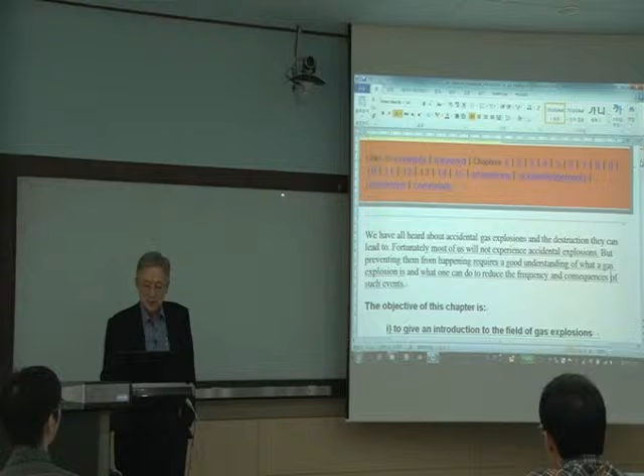Gas explosion. This chapter is again gas explosion. So we start to cover already and talk about the definition of the gas explosion.

Yesterday, Chu Bong-shik pointed out one mistake I made in the shock wave profile. So if I make a mistake, anybody can make a mistake. I want you to really point it out, then we can make corrections, okay? Can you see this clearly? Dr. Kim, can you see?

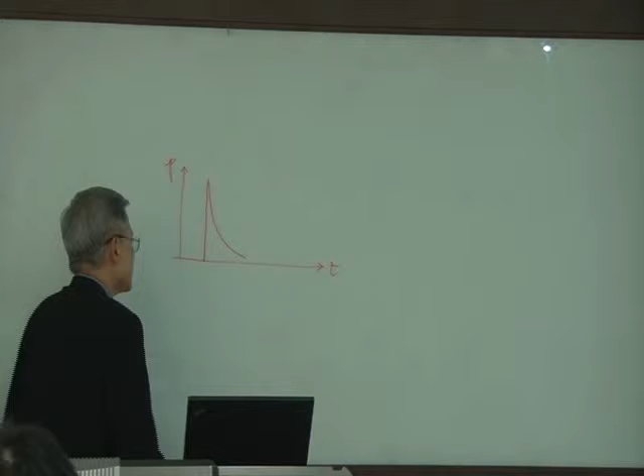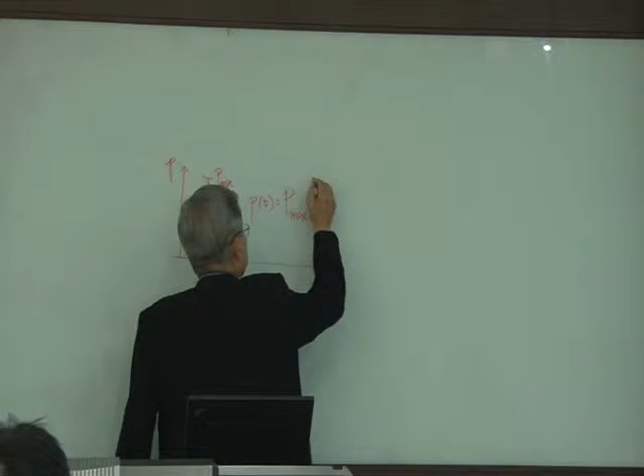So what we talked about yesterday briefly, I'm going to come back to this, of course, in early November when we deal with the real shock wave. But for the time being, this is what I showed, straight up and down. And this is what I mentioned. Then I gave you an equation set saying this is P max, and this is equal to P max times e to the minus T over theta, or I said the whole thing could be minus something like alpha T. Right, that's what I said.

Bong-shik pointed this out after class. He could have stopped and told me right at the moment, then I could correct it right away. What's the mistake here? In the class, we can talk about anything. I always mention there's no such thing as 'you're right, I'm wrong.' In the class, we discuss things, understand them, and move on. So here, I made a mistake.

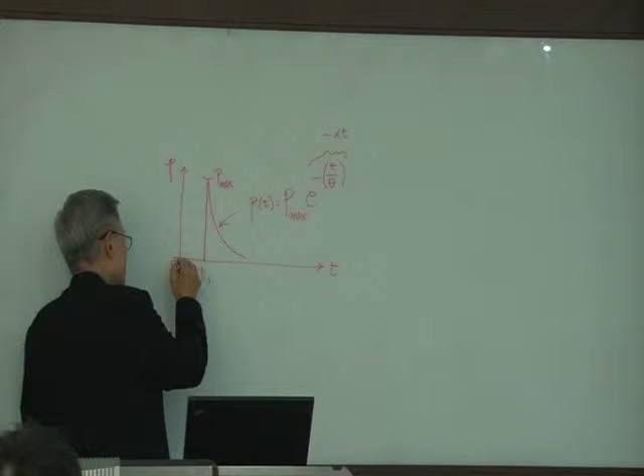Sung-tae, what's the mistake I made here? I will say this is time T1. Of course, this is 0. Typical shock wave pressure profile, yes.

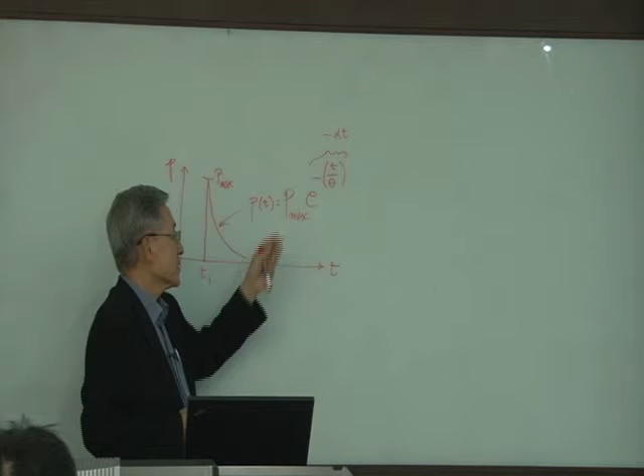The mistake is in fitting this particular equation. I have to set this axis as P, and this point I have to set as 0, right? Makes sense? For example...

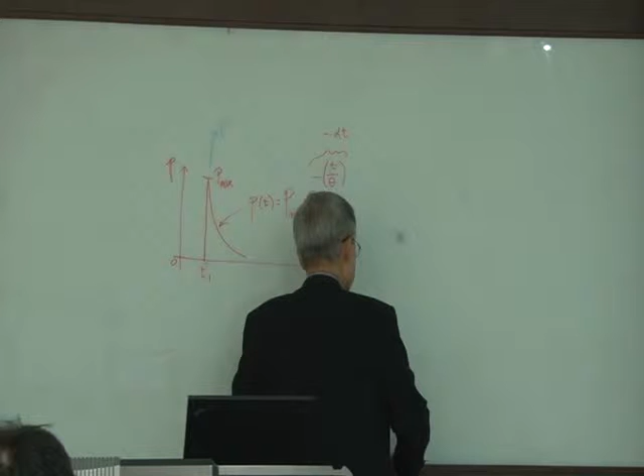Core of explosion. Explosion occurs right here. I'm standing right there. Then the shock wave, of course, will propagate, then hit right there. Then it passes - the shock wave will pass by. So this is the shock wave pressure I feel right on that side here.

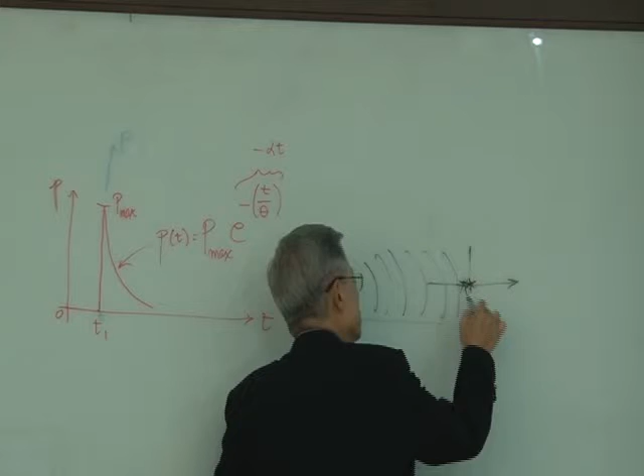But if I set this point as the starting point, the reference point, this is right there. Then I have to move this axis to here rather than here, right? So it takes time, of course, for the shock wave to reach from here to here.

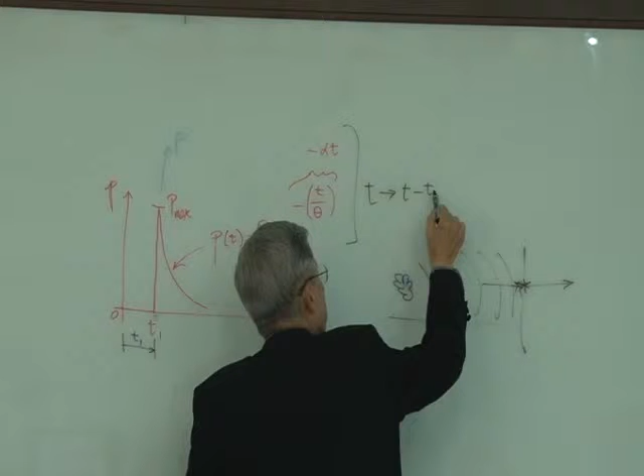Let's say time T1. If I'm going to set the reference point right here, then what do you have to modify in this equation set? You replace T by T minus T1, right? Say yes. So if you replace it, then you can start to count from the origin. This is origin, this is 0, the absolute 0 point. Makes sense, right?

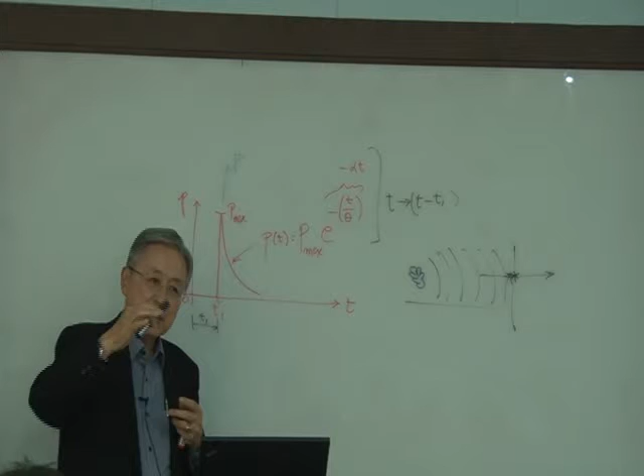So to use this equation set to calculate the responses and all that, if you use T minus T1, that's okay, but your reference point is right here. And the same thing happened for the air explosion problem set.

Could it be down there? But this is P max. So I said this point is over pressure, this is under pressure. So the equation set here could be P(T) equals P max e to the minus...

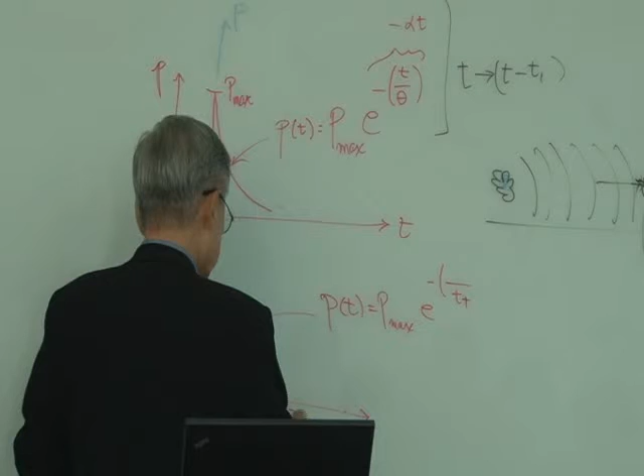T1, I use T plus, right? I use T plus. This point, this is T1. So this is T1. This is going to be T plus. I use this...

Or again, I can use alpha T, then 1 minus T over T plus. You have to replace the same thing, right, if you're going to shift this to here. If you shift that to there, then down here, this is set as 0, then this is the equation set.

But if you're going to use this point as the reference point, then you have to move T to T minus T1. This is where, in other words, sometimes there is a convenience for the computation.

So, for example, I have a ship. Explosion occurs right there. Then when it explodes, the shock wave will propagate and hit the surface of the hull.

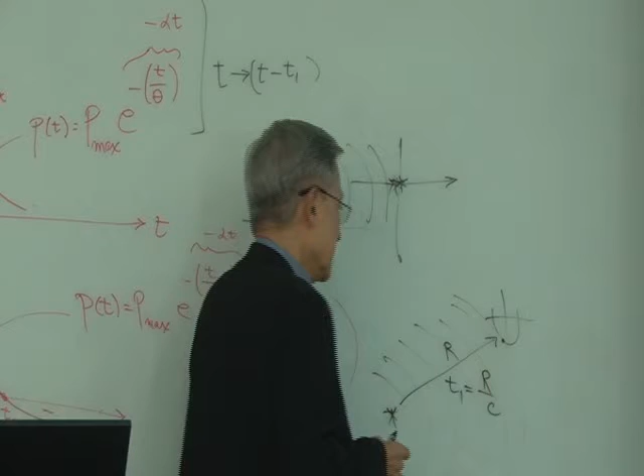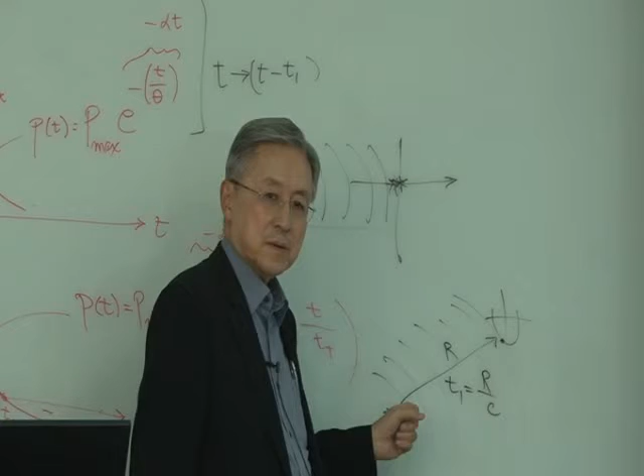So some people start counting the time right from here. Then this equation set is all okay, but oceanographers who work in that area - my interest is not only here but also here. Then the reference point is here. When it explodes, you start to count, right? When you start to count, then it's the reference time 0.

Then you have to replace T by T minus T1. But another aspect - over here, I'm going to call this guy a specific name. This is dynamic pressure.

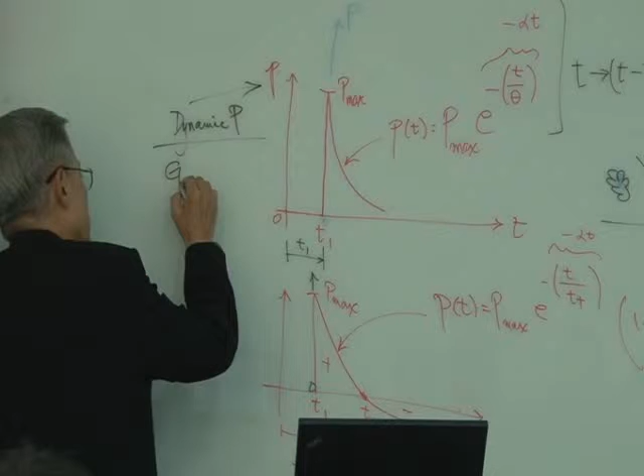Some people call it the gauge pressure, same thing here, dynamic pressure. But when you're...

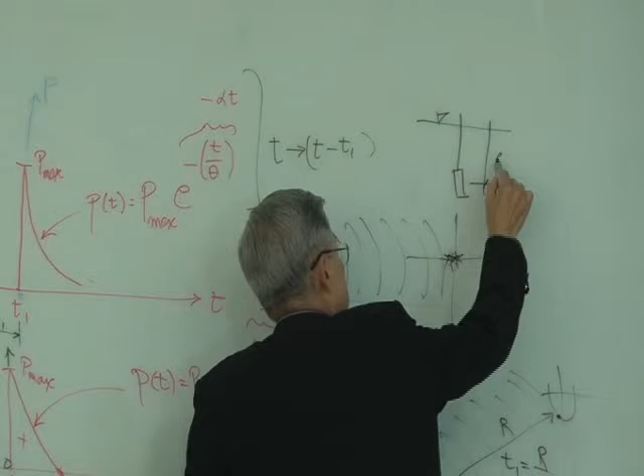dealing with pressure gauge out there, for example, this is the ocean. So when you put the hydrophone down at a certain depth D, there is an initial pressure, right? Initial static pressure, it's hydrostatic pressure. Initial hydrostatic pressure: rho GH, rho GD.

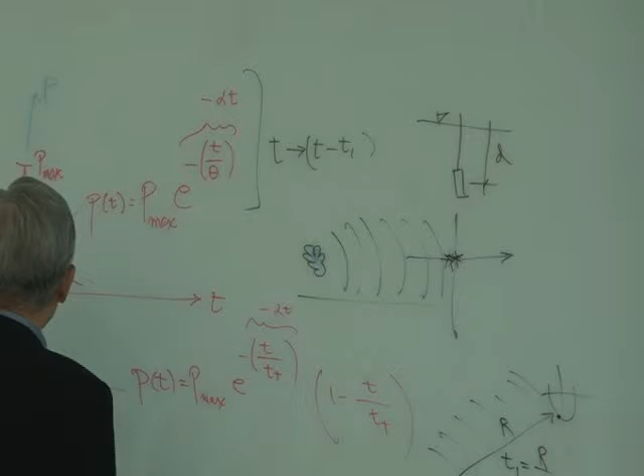So if I draw the shock pressure in an absolute sense, I'm going to draw this as P. This is absolute, nothing to confuse here, absolute pressure. Okay, I'm going to draw the absolute pressure.

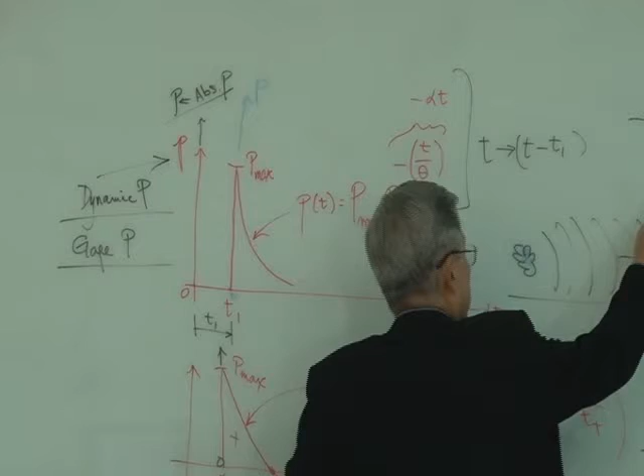So right at this point, your charge or source could be right there. I have to draw the initial pressure. Initial pressure is there when you deal with the total pressure.

Confusing? Nothing to confuse, total pressure. My interest is the total pressure, which is absolute pressure at the time, when initially everything is calm, no gas explosions, no chemical explosions. Then what pressure do you have? You have hydrostatic pressure, right? That's it, right?

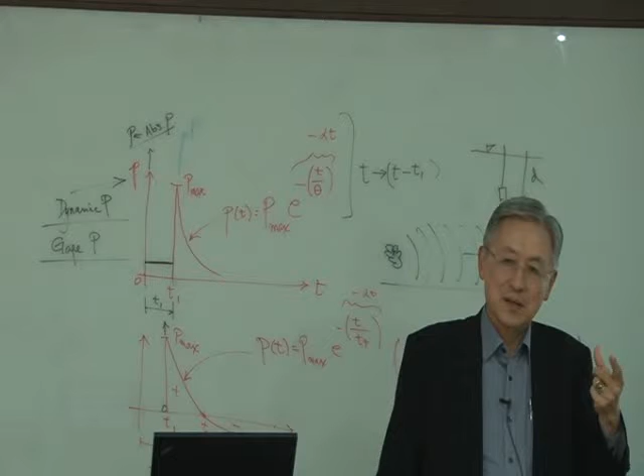Sure, that's all? Or more? Where did the atmospheric pressure go? Do we have pressure right now? Are we under pressure? What pressure? Gravitational pressure, right? We are under atmospheric pressure. We are not in a vacuum. So we are at 1 bar, right?

1 bar, how many megapascal? Anybody know? 1 bar is 101.3 kilopascal. Yeah, see, 101 kilopascal is 1 bar. That's what Hyun-Chul said.

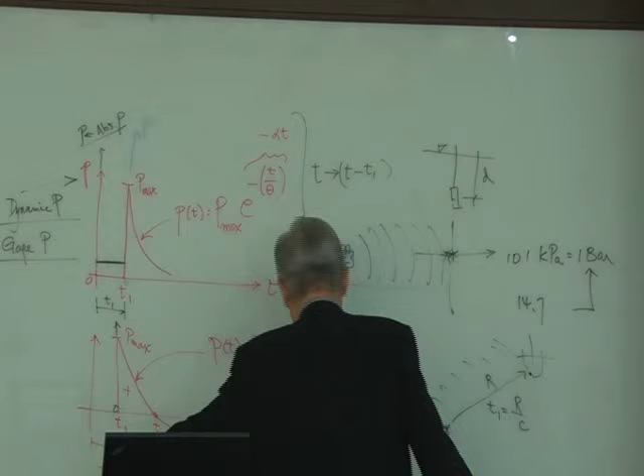We are under 101 kilopascal. Gosh, that's amazing, isn't it? In gravitational units, 1 bar is 14.7... 14.3 psi, pound per square inch. Typically 1 bar is 101 kilopascal.

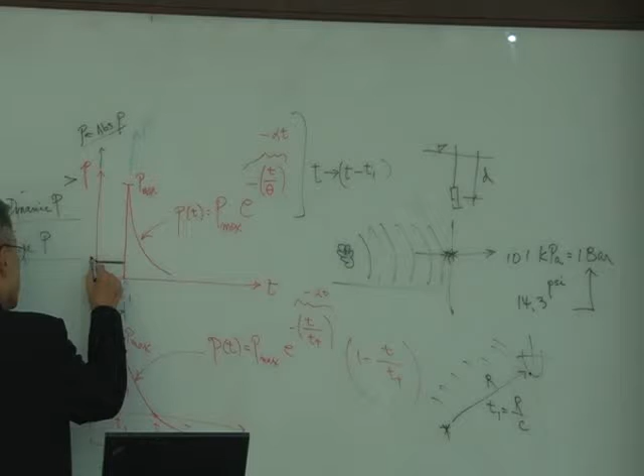Plus hydrostatic pressure. So initially you have PA plus rho GD. This D is the hydrophone depth, for example, just an example.

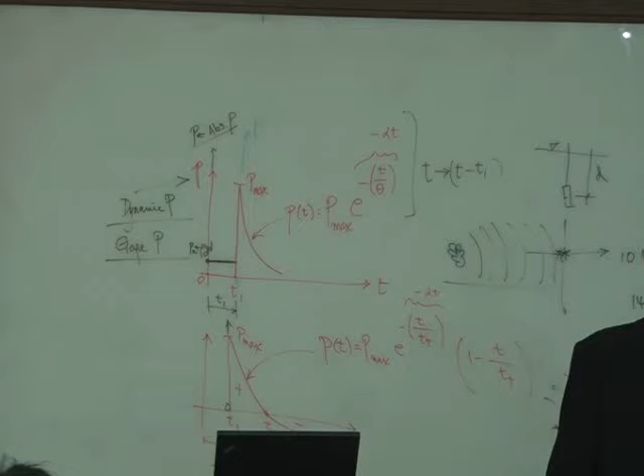In other words, simply static pressure is there when you deal with absolute pressure. But usually for dynamic analysis, you don't have to worry about the static pressure. Why? When you compute the response for moving loading, dynamic loading, of course we don't care that static pressure is there. You can just compute the response, which is a static response, and simply add it on. Right, Songtae? So nothing changed.

Then you can add over here. It could go up, then what happens? Is it going down the same downhill like this? No, because there is always static pressure there. Then this could approach the static pressure, which happens to be the atmospheric plus, in this case the hydrophone, the hydrostatic pressure.

But if some other things happen, of course, a lot of things could happen, things like that. We'll discuss all the aspects starting November.

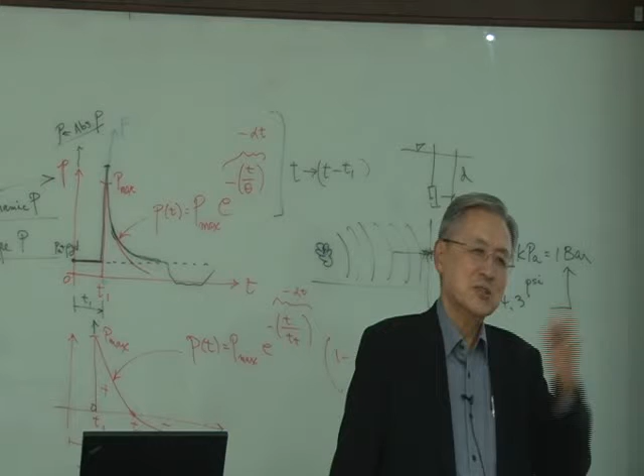Because I'm really doing my best to say some meaningful things on gas explosion. And of course you're not going to just sit there listening. You're going to work on gas explosion, doing some good initial research on gas explosion yourselves, in addition to the fire.

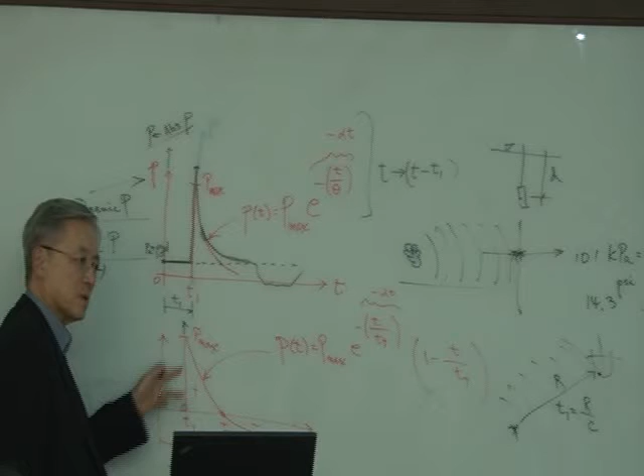Then we'll be working on November, we're gonna work on the underwater explosion stuff. Okay, so the same thing happened, you could have initial pressure go up and down. Okay, so this is what Bongshik, he came late.

Bongshik, so this is what he mentioned to me. It's very clear. Gas explosion.

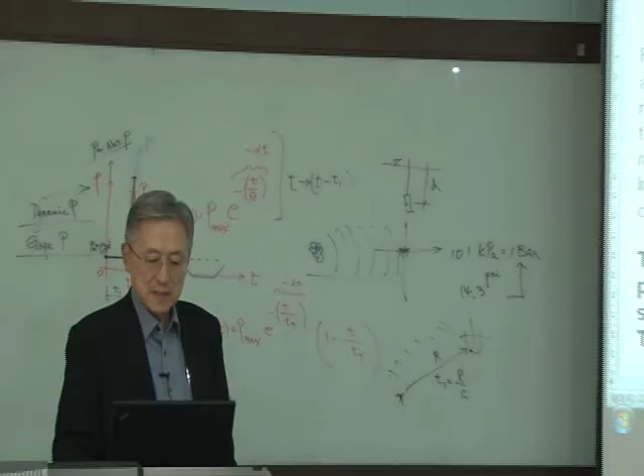How many of you read chapter 1? How many feel like who cares? You should care. Whoever is just sitting in for fun, that's okay, but listening is also good.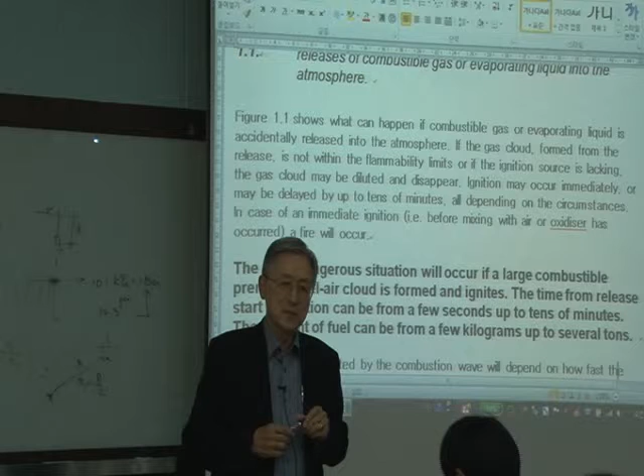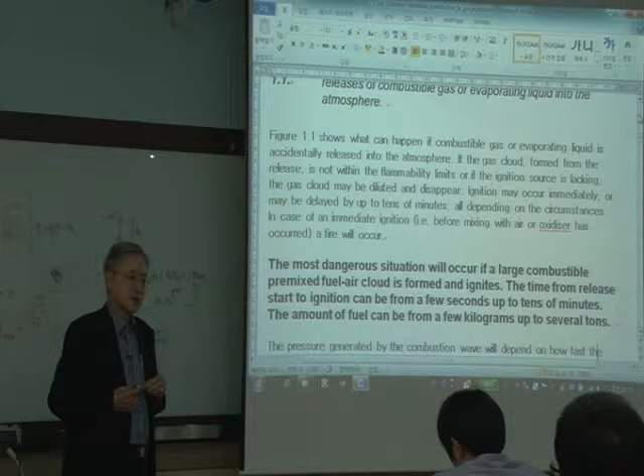But whoever is working in Professor Chang's lab, you should, I said should, not you may, you should read the Gas Explosion Handbook. It will provide you an excellent foundation to work on gas explosion, in conjunction with other chemical process design or structure system design, or vice versa.

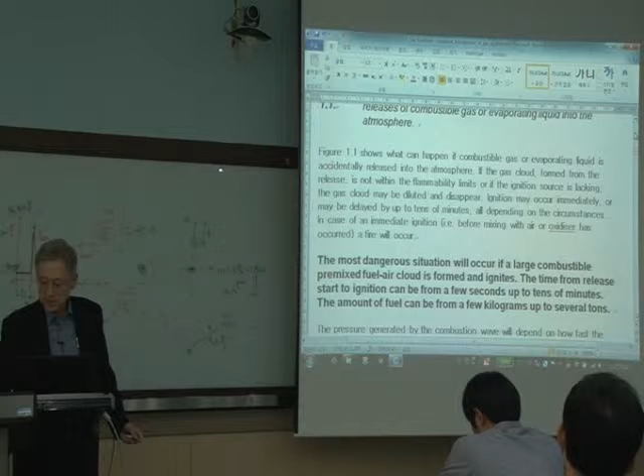And this highlights, I did it just to point out some importance, I talked about that before. And also BLEVE, you call this BLEVI, is it correct? I call it BLEVE. When you think about BLEVE, you have to talk about the pressure vessel, and you are talking about high temperature.

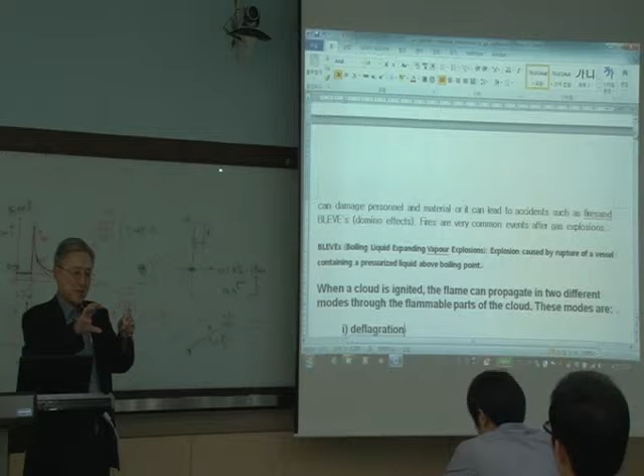So then this could generate something like a domino effect. Then you can think of the high pressure vessel connected like a train, a continuation connecting the pressure vessel type. And deflagration and detonation, we talked a little bit about on Monday. Deflagration mode of flame propagation is subsonic.

Read well between the lines. The deflagration propagates at subsonic speed relative to the unburned gas. The unburned gas is there, and it's moving faster too.

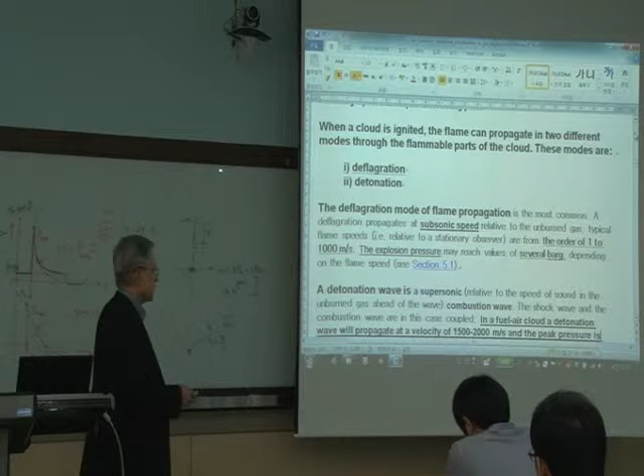I think on a later portion of this chapter there should be a nice 1D picture. We're going to wait until that time. But this...

Speed is 1 to 1,000 meters per second, depending on the unburned material property. Could it be oil? For oil, acoustic speed may be different, of course, from acoustic speed in water, air, and all that.

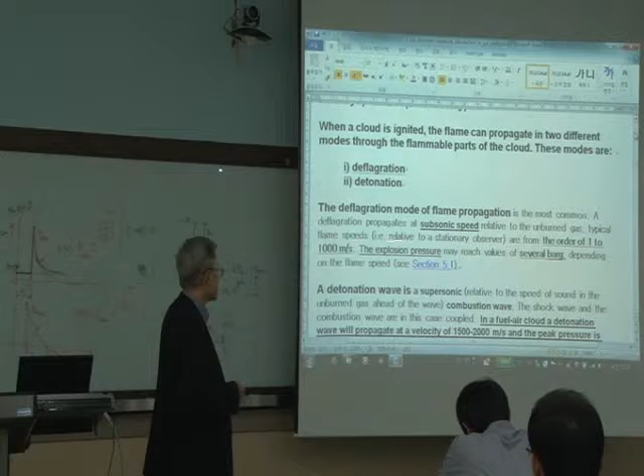Look at the range of speed here. Deflagration flame speed is 1 to 1,000 meters per second. Think about the range—it's a tremendous range.

For the medium I'm always dealing with, it's water—water or air. Acoustic speed is rather fixed, about 350 meters per second, or 1,500 meters per second, fixed.

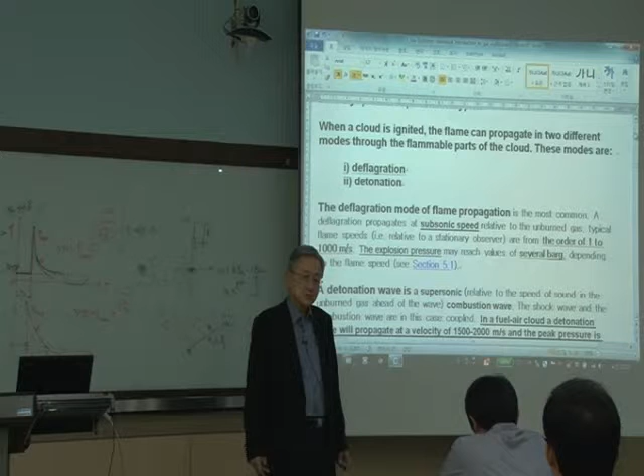But in gas explosion, it's a tremendous range. Deflagration flame speed, you can deal with 1 meter per second to 1,000 meters per second. Deflagration simply means rapid burning—that's about all, rapid burning.

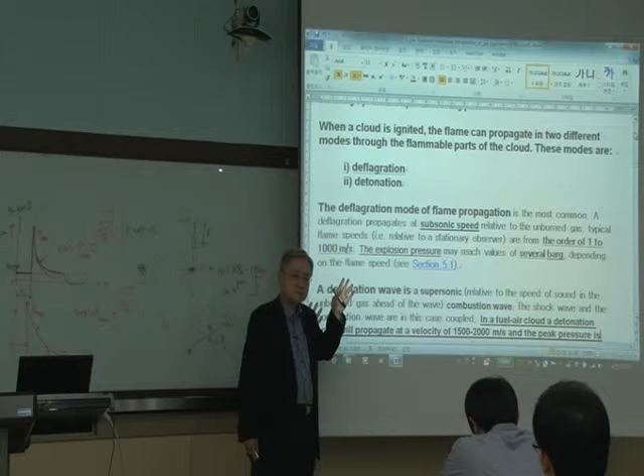When you talk about detonation speed, it is supersonic, meaning it's higher than the acoustic speed of the unburned gas or unburned material, whatever the material is—supersonic, higher than acoustic speed in that medium.

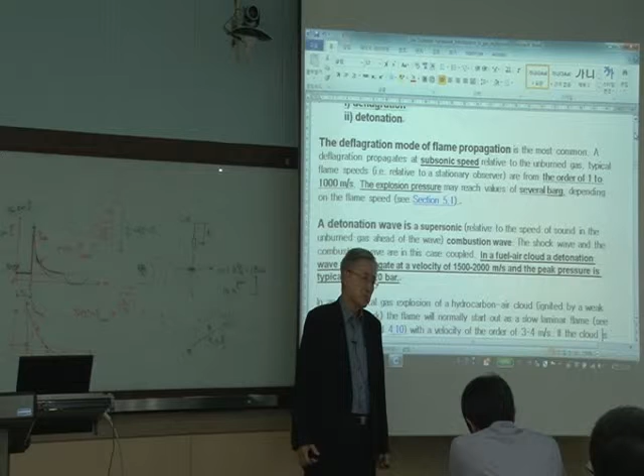In the fuel-air cloud, detonation wave will propagate at the rate of 1,500 to 2,000 meters per second, which is pretty generous. Detonation speed in water for a chemical explosion is 8,000 meters per second. So for gas explosion, the range is about 1,500 to 2,000 meters per second, which is pretty low, I'd say.

And peak pressure in the detonation situation is rather low—it's 15 to 20 bar.

For the chemical explosion, I'm talking about pressure of about 50,000 times atmospheric pressure. Tremendous—it's absolutely, really, really high—50,000 bars.

So the comparison isn't really there, but gas explosion happens every day. Did you see the news last night, or even this morning? Did you see the news? There was...

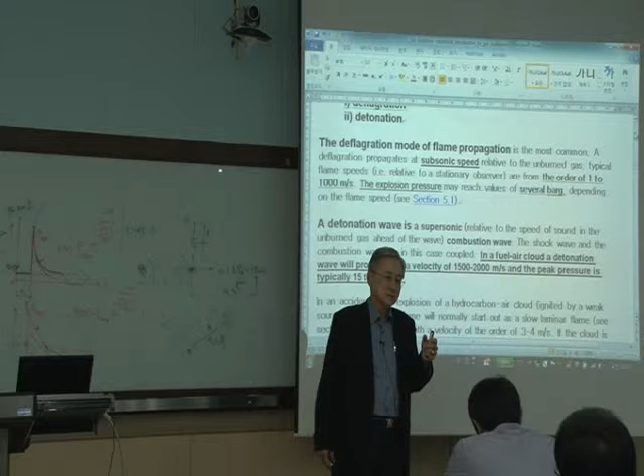This happens every day. In Busan last night, the CCTV camera happened to capture the accident. It was a human accident—he happened to touch the valve, then it looked like it loosened up or broke. Then the gas just vaporized and came out, then spread all over.

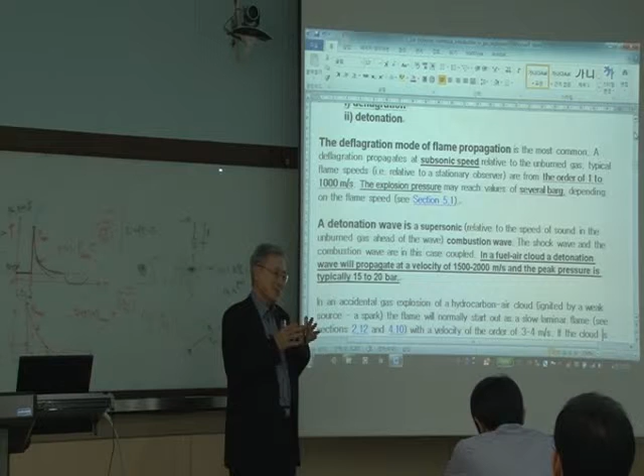So usually explosion, especially gas explosion, is always connected to an accident. That's connected to safety, connected to safety management. One small mistake looks like it kills everything.

So with this subsonic deflagration, the pressure is very, very small—it's just several barg. G is gauge.

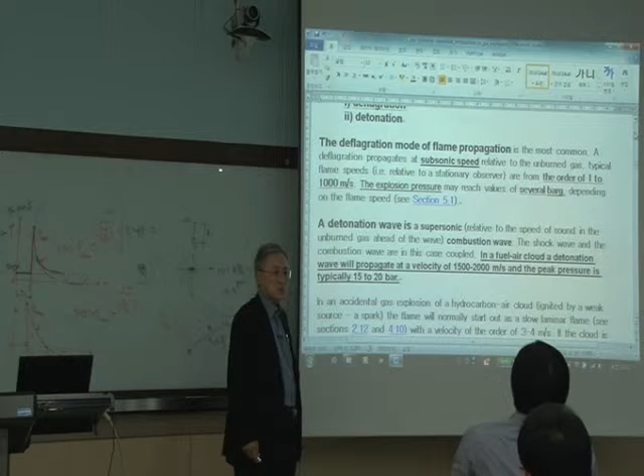Depending on the situation, gas explosion magnitude changes tremendously. The worst situation is gas explosion in a confined area—confined volume is a disaster.

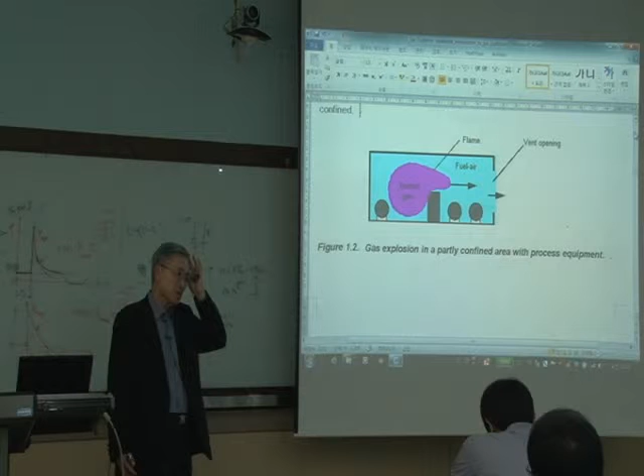A lot of the time there's an opening or ventilation put in. Then, of course, at the time of gas explosion, the induced pressure goes down pretty fast.

As I mentioned the other day, we're going to conduct explosion testing above the ground, but covered by soil, next April. But usually explosion could occur in a confined area.

All the neighboring spaces, everything is all compartmentalized. When a missile hits the deck, it doesn't explode right at the deck. When the impact occurs, it penetrates down to the compartment, then explodes. What happened? That's confined—but they still have ventilation openings there, though that's not sufficient.

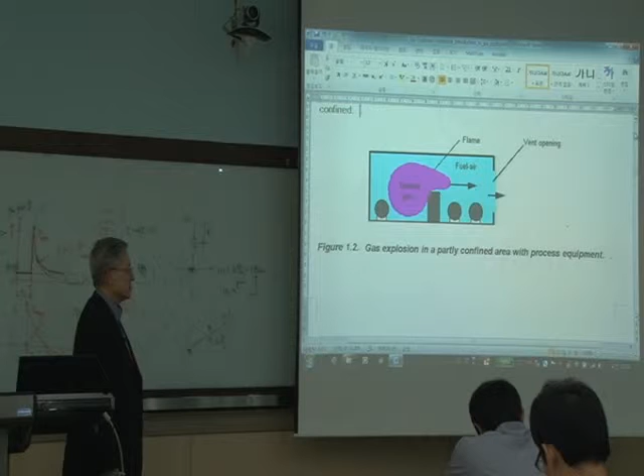It could be a big problem. But as I've seen in the North Sea, a lot of oil drilling platforms—when I see the fire in the pictures and all that, it looks like confined explosion generates tremendous safety problems. This is a partially confined situation. I'm passing by, but I want you to read it, okay?

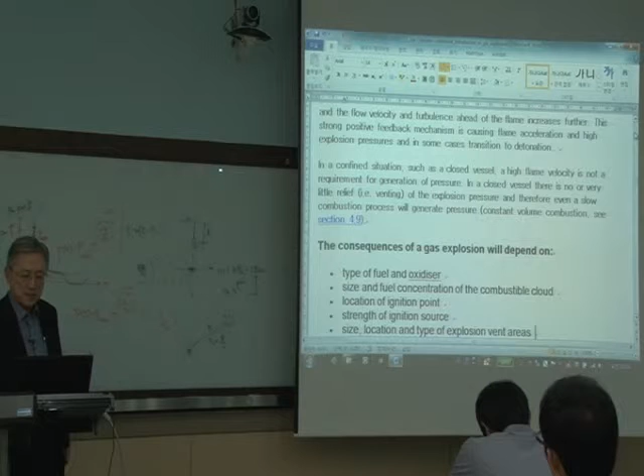And the consequence of a gas explosion will depend on, and summarize, the following. As you see here, there are tremendous parameters, not just one parameter—type of the fuel.

Depending on the type of fuel, the ignition temperature is all different. Methane seems to ignite at a pretty low temperature. But for hydrogen—over the whole range of temperature, it can ignite, which is dangerous.

So there's no such single rule, but a lot of parameters, like type of fuel. European people use S rather than Z; in North America they use Z, 'jet.' That doesn't make any difference. Depending on what you use, the type of oxidizer used is going to be different—air is also an oxidizer. A lot of different oxidizer types.

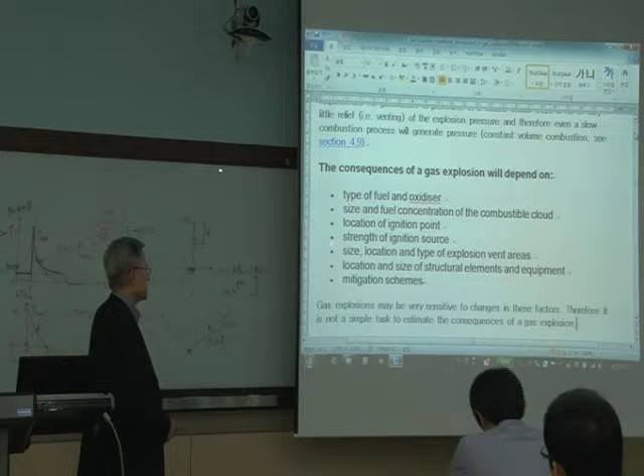Location of ignition point, strength of ignition source - all this you have to consider at the time of the design of the fixtures, structures, or system you are dealing with. Size, location, and type of explosion, the vent area - venting is important. Location and size of structure element and equipment. Mitigation scheme - what's the mitigation?

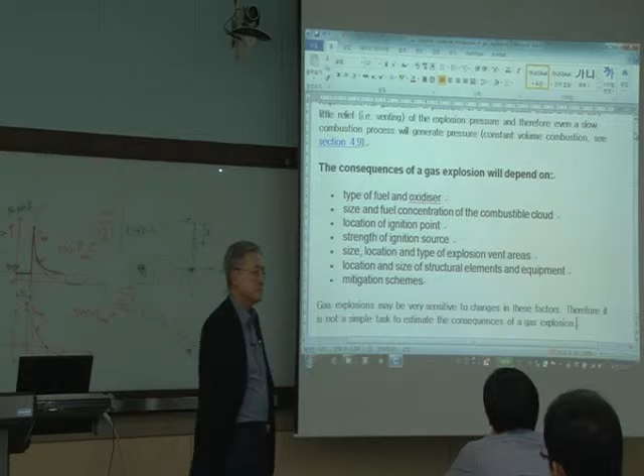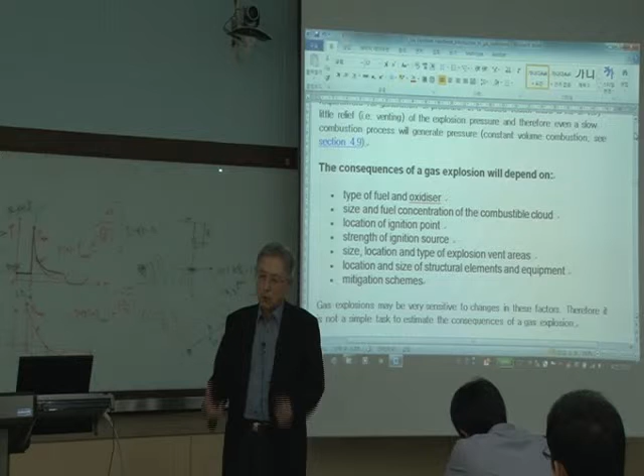Abdullah, you know the mitigation? The meaning of mitigation? Mitigation is really make it lower. So mitigate the shock means somehow lower the shock, vice versa.

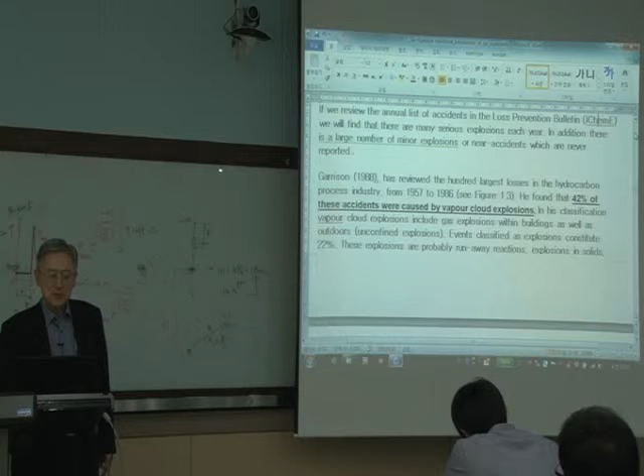Loss experience is when you have box lunch with a friend, then I want you to read all this loss experience. This is based on the 1988 report. That's already 20-some years back, but you don't have to go back 20 years. But every day you see, maybe you can start to log in what you see every day out there.

Gas explosion experience is tremendous. But one thing is clear, as you see the figure shown in the next page, 42% of those accidents, including all shown here, were caused by the vapor cloud explosion. Vapor cloud explosion is equal to gas explosion, okay? So if you see vapor cloud explosion, that's really identical to gas explosion. As I look at a few different books, vapor cloud explosion, they just use their own name, but everything, all this is gas explosion.

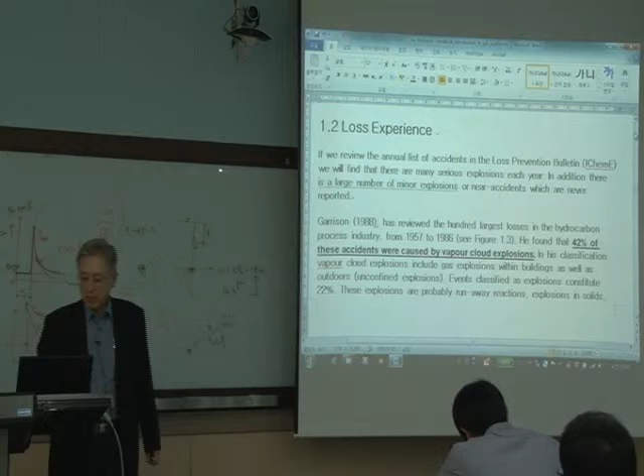Gas is a mixture of the fuel and the oxidizer. And the worst thing is 42% of accidents are by gas explosion.

Amazing. Professor Han showed during his lecture, I remember, 42% vapor cloud explosion, gas explosion, 35% fire. Fire and gas explosion, you can't really separate them. They're something like husband and wife, they always go together. They love each other. Whenever explosion occurs, there is a fire. Regardless, they always work together.

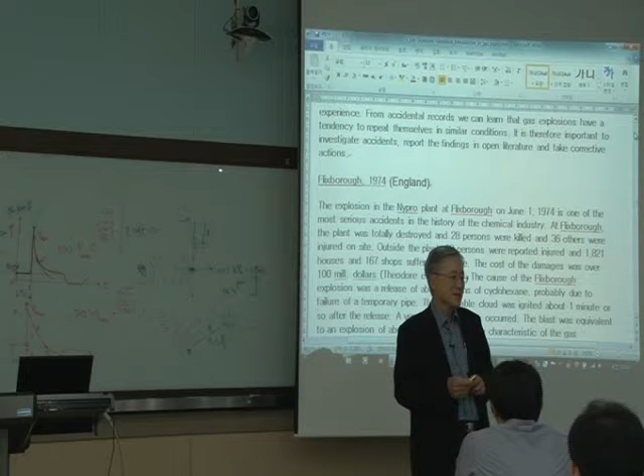And did you read this a little bit or not? Say something, I don't want to keep talking myself. Yes sir, did you read? Not yet, right? Okay, not yet, huh? When are you going to read? You are willing to read? Don't say no, yes right? For your own sake. You will surely read. You read already? Yeah, I just. You are the expert in all this. But read this, you already made a copy. Yes, I made the copy from the web page, screen capture.

And at the same time, you can learn the English. This is very straightforward, the English phrase is here, so very easy to read. And Hyunchul has made a copy. So if you make a copy each chapter at a time, then by the time you finish, you can have a whole handbook.

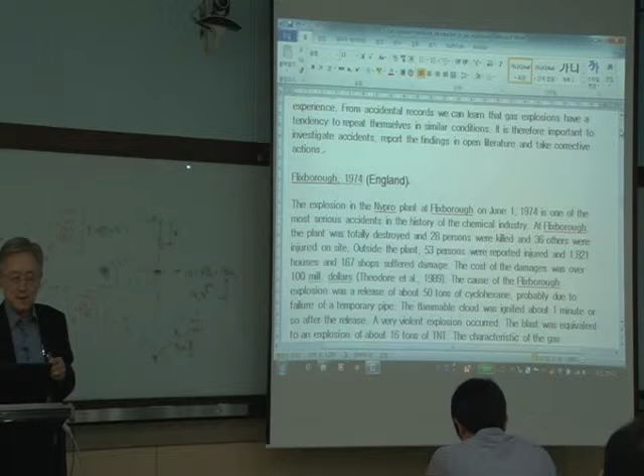And the Flixborough accident - this is England, I added England here. All this accident, you can investigate, you don't need to travel. Everything is where? Where is all the information you can access? Where? Internet - I access internet. Everything, all the detail is there. What else do you need?

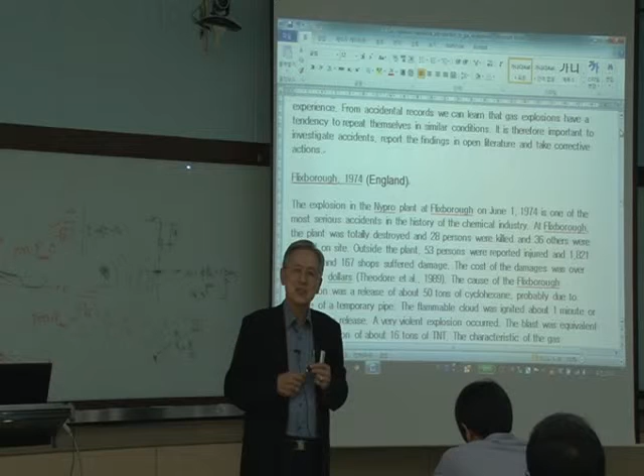So you have an explosion of information. When I was at your age, age of 30, no information available. Spend the whole day, whole week in the library, still no good because it's old information. But now, everything is on your hand, so luxurious.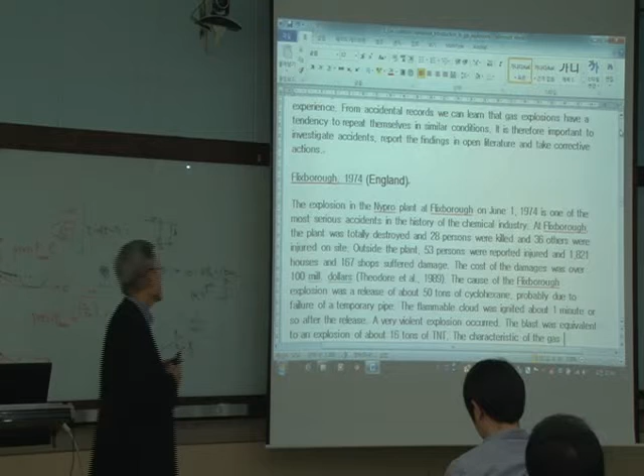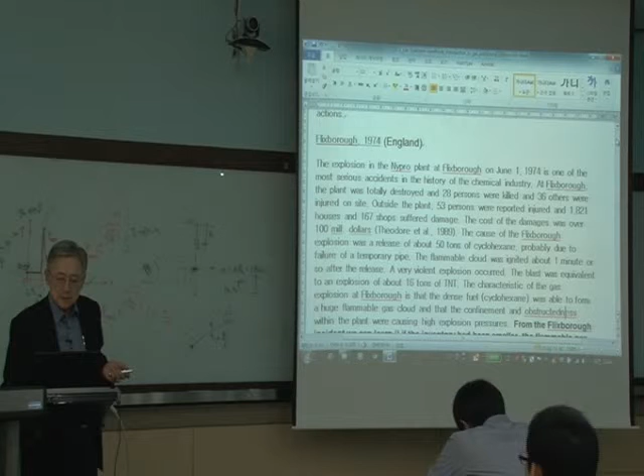So the Flixborough accident, this much information, I feel, is more than enough. So this is something like 28 people killed, that's a large number. And as you see here, always at the end of the paragraph, there is a lesson learned. That lesson learned is very important. So all this accident as it's described, then lastly it shows what lesson do I get.

So lesson learned - we can learn if the inventory had been smaller, the flammable gas cloud would have been smaller. So reduce inventory, which looks like nothing, but it's not true. All these days, each company has a huge warehouse and stocks of merchandise to ship out. No more, right? You know that.

You heard about that, right? For example, I heard Nike, nowadays their business may be spread out much more. They deal with shoes, sneakers, all kinds of things, right? And of course, sports jackets, even caps, you name it. Do they have a huge warehouse sitting next to their office? They don't have a warehouse. Do you know where that is? They don't have any single warehouse. Everything is right on the spot, the factory, manufacturing places and all that. And the same thing happened to Amazon.com. I buy the book.

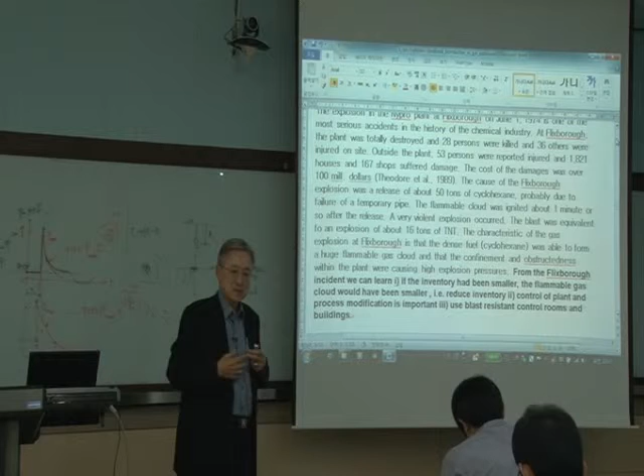And of course, the blast resistant control rooms - who designs that? You design it. To design the system, you have to know the loading. I've talked about this before - I usually repeat the same thing 3 or 4 times, so you end up knowing how important that is.

Blast resistance design, including tunnels. Tunnels - we have them in Korea, everything is small hills and mountains. When I ride a train from here to Seoul to Busan, I don't know how many tunnels I pass by, tunnels after tunnels and tunnels.

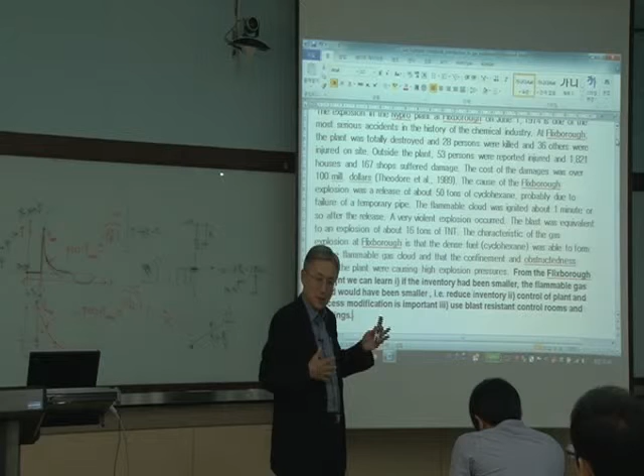And when an explosion occurs by accident, what happens? I know our tunnels in Korea are safe, but the question is, are they always safe? In the US, they really study hard with defense people to check out the structural safety of tunnels.

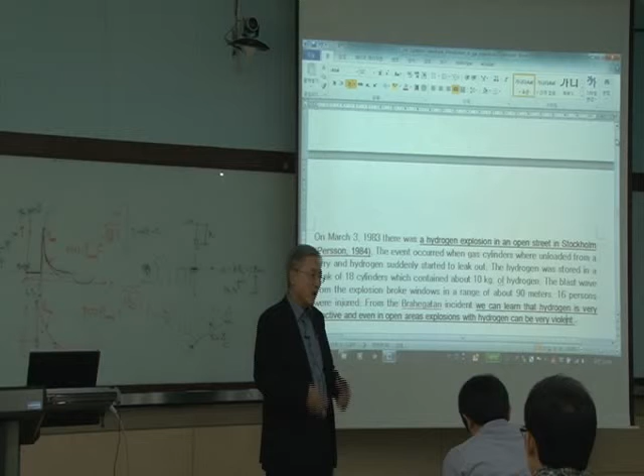And in Sweden, hydrogen explosion is always very detrimental. One case here - right in the open street of Stockholm, that's Sweden, an explosion occurs. So the problem is gas explosion occurs anywhere. It doesn't happen in remote areas - no, right in the downtown of a large city the explosion occurs, not by terrorists, but by piping failures, a pressure vessel happened to be sitting there.

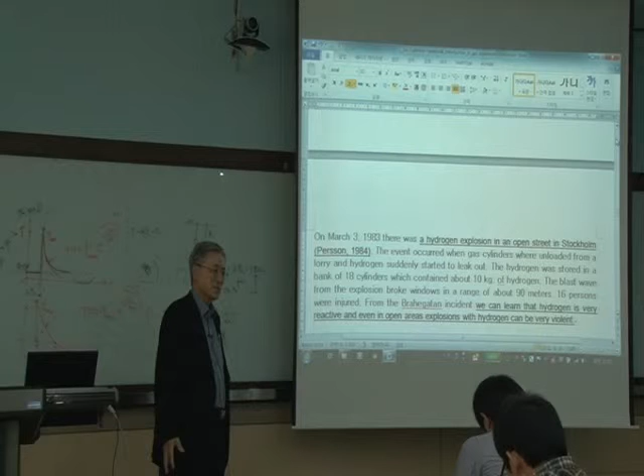As I drive down near Kim Hae, right next to the highway, I see the nuclear reactor. I saw the nuclear reactor - I'm not sure whether it's alive or dead. See the reactor there, right at the middle of the town. It's dangerous. In peacetime, nobody cares.

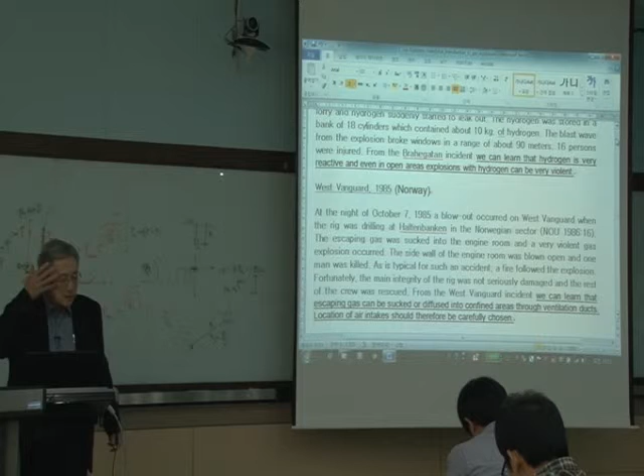But Norway, they have lots of cases, and all this lesson learned - I want you to please read this lesson learned. Even an ice cream factory has very interesting situations here.

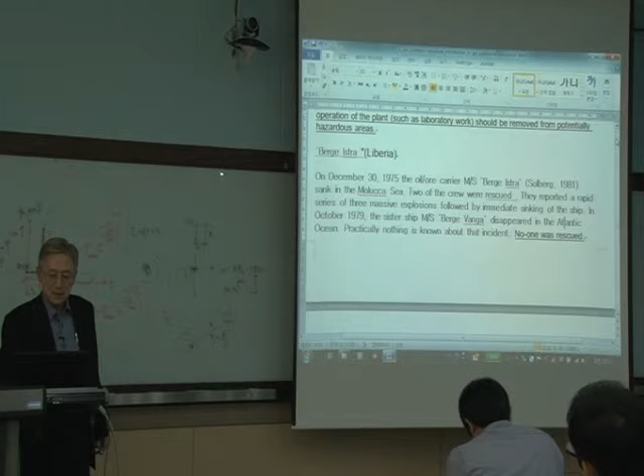And some - this Berge Istra. This happened, I'll just talk about this as a comment. Liberia, Berge Istra - this is a carrier, an oil carrier, and two vessels sunk. But the second vessel just disappeared from the horizon - nobody knows what happened to that vessel. What happened is right at the bottom, by the gas explosion, the bottom just opened up.

And there's no such thing as stay time on the floating - everything just goes down, like the Cheonan naval ship. The Cheonan naval ship, not bad, it floats a little bit. But this Berge Istra just opened up by the explosion and sunk right there - first or second, it happened.

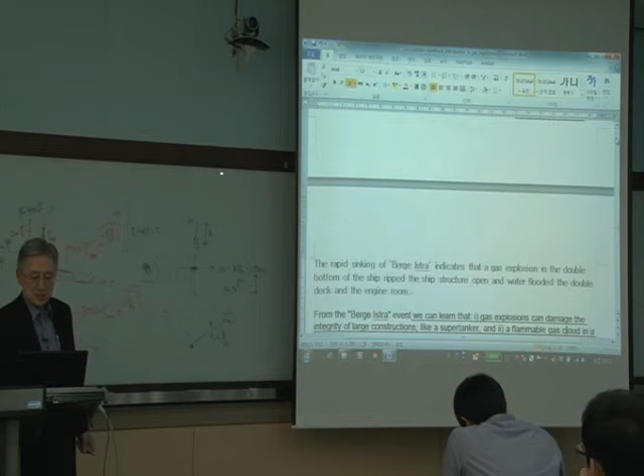This is a design matter, but here is a lesson learned and all that - more and more and more. So please read. And the last section is analysis and management of gas explosion safety.

The biggest issue is safety management. Safety management is always talked about, but you have to get involved to really see it. Before you get involved, everybody feels, including myself, it's going to be okay - there's a thunderstorm coming in, I'll be okay, chances to get killed are 1 out of a million, I'm not going to be that one.

What happened? Two Korean young people were hit by thunder and they were killed in Sri Lanka - 2 died.

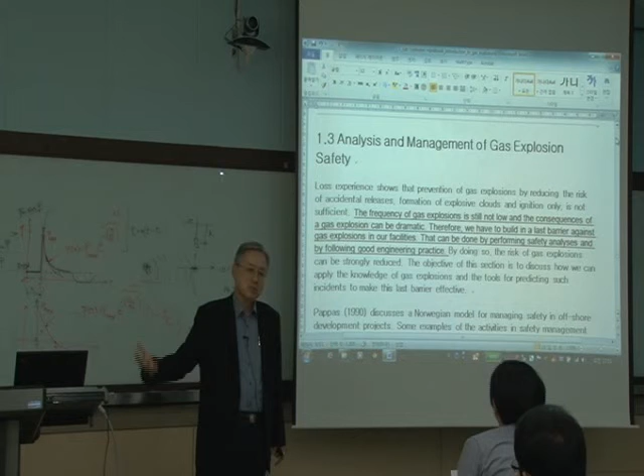So for management, safety aspect - my plant's gonna be okay, my FPSO's gonna be okay, my oil drilling platform's gonna be okay. No, you have to really consider it.

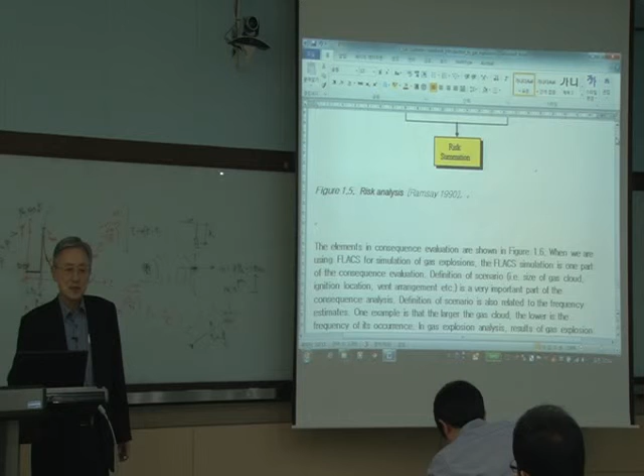So chapter 1, I'm gonna just do like this. Then lastly, this chapter 1 insists you have to conduct risk analysis.

I know Professor Zhang offers a risk analysis course, right? Yes? He offers it, right? Processing aspect - did you take it? No. You should take risk analysis.

These are all probabilistic matters. So gas explosion, as I mentioned, the probabilistic aspect is so important. I want you to take the course while you are in school.

When you are out, done, okay? Then don't say, Professor Shin, Professor Chang, I want to come back and stay here, then study more. That's what I heard from my students who graduated - I want to come back, this is the best environment, and the school is beautiful. But when they were here, they said, I hate you because you assign too many problems. But that's what the reality is.

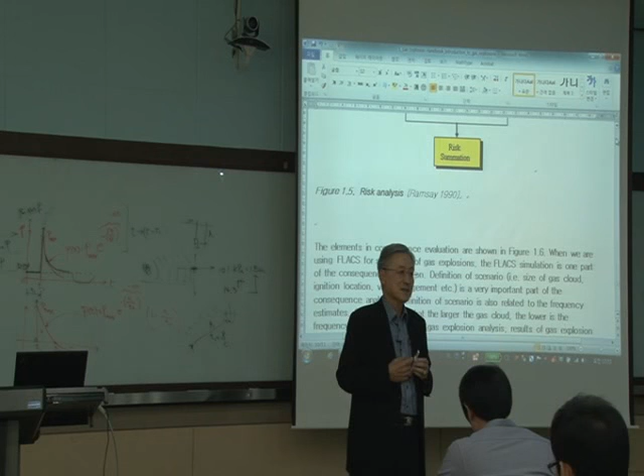Okay, so chapter 1 finished. I want you to read, and from next Friday we'll move on a little bit faster, okay? It's your time to read. For me, it's hard to really pick and talk about all the material here - the main thrust is reading. Okay, have a good day.